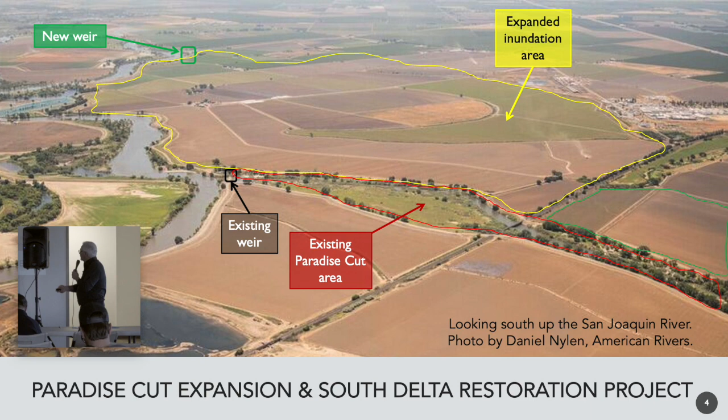And of course, Paradise Cut's gonna go up when we put more water into it - so Paradise Cut itself would rise. That's the old estimate based on the project as originally conceived, but that's not the project we're gonna move forward with. Because of these issues, we wanted to make sure that everybody could support something that didn't hurt them, to put it the wrong way.

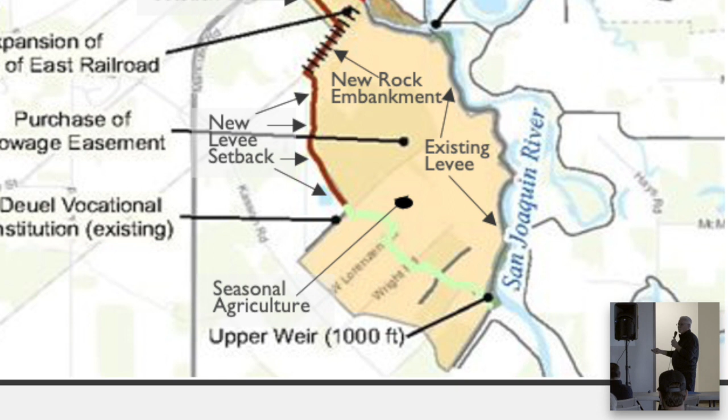So here's the original footprint of the previously conceived Paradise Cut expansion. You go upstream and put a weir, a 1,000-foot weir, and the reason we go upstream is because the analysis of expanding the existing weir didn't get as much water as a new weir upstream. That has to do with the slope of the land leveling out near the weir. Anyway, you get more water.

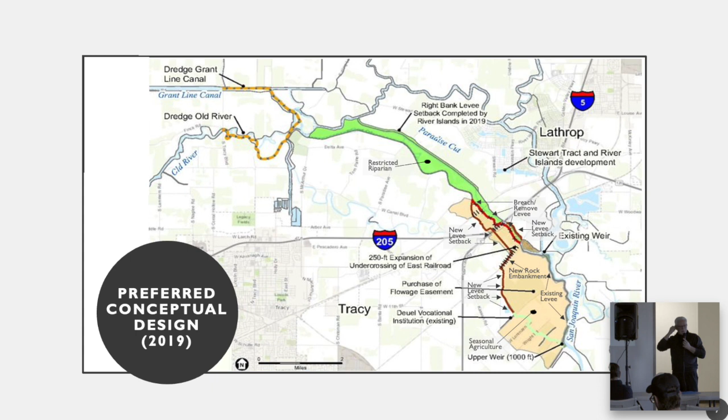You overflow into these areas. We've already talked to Borba Machado, and there's no deal set, but they say they're willing to discuss that, so we're not going in there threatening that we're going to condemn their land. They're willing participants. We'll have to negotiate eventually and pay them what we can if we get that far. But anyway, the overflow goes here.

We have a new levee inboard, on the land side, so the water doesn't keep going somewhere else. We keep the water in here, and then it flows down, and we put it into Paradise Cut. Paradise Cut is that relief bypass, remember I told you? So we want to make sure we route the water off the river to help everybody during those peak flows, and the peak flows are the biggest problem.

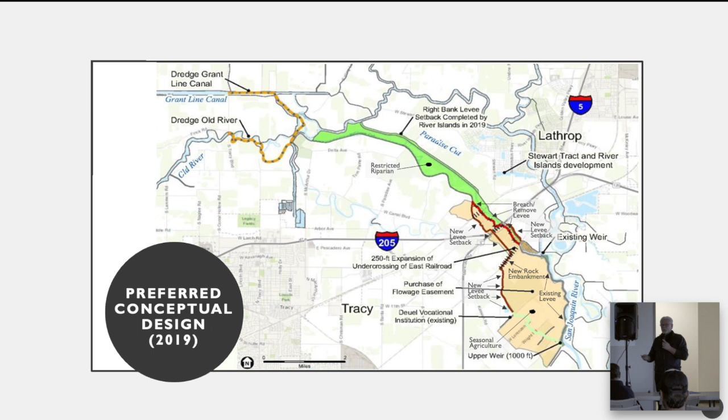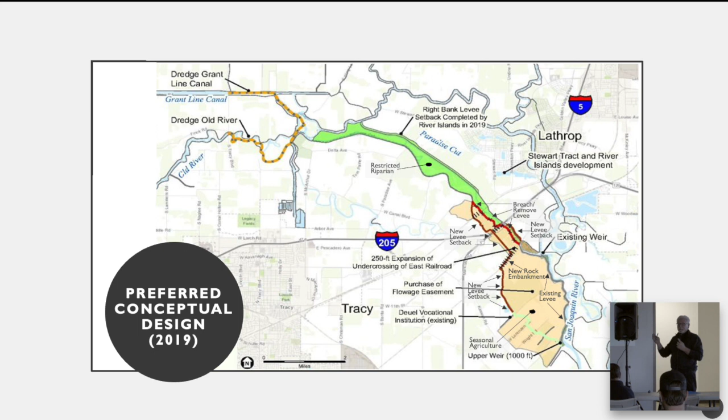I don't know about this year. But anyway, so that's the idea, get those peak flows - they temporarily stay in this area, then flow downstream. We put them back in Paradise Cut. Now, in order to do that right, you've got to do additional engineering analysis. We have to find out how big, how much improvement, any levee work, any rocking - all these things we might have to do so that Paradise Cut safely contains and transports that water.

So River Islands over here has done a wonderful job on levee work and everything. We appreciate them - they've been a partner from the very beginning, both money and support, so I want to thank them. But anyway, we want to make sure that anything we do there is agreeable to RD 2062, RD 2058. Everybody who's involved has to be in agreement, so we figure out what we do. That could include additional levee setbacks.

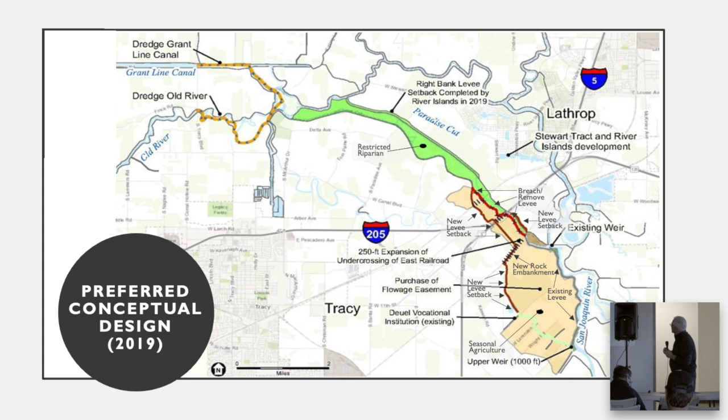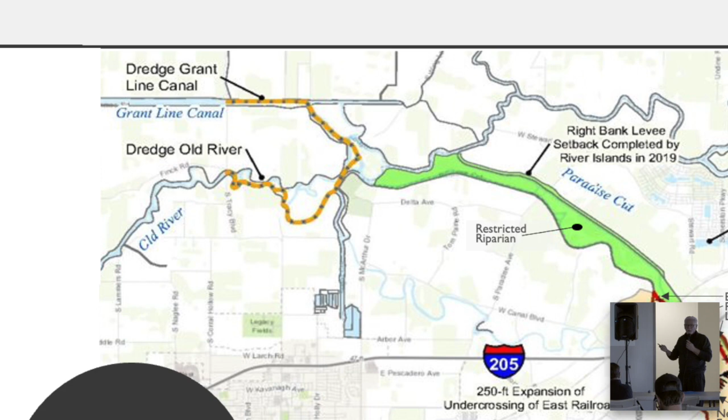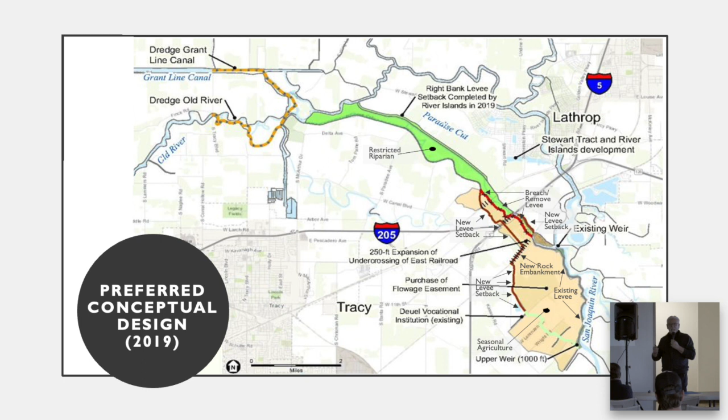That's just a question of land and money and cooperation. So we have to make sure we route the water safely and it gets downstream. Now the original analysis had 5 miles of dredging downstream here to partially address any increase in stage that occurs. That's all been subsumed now into the larger dredging program, but the original idea had this dredging and estimated how that would decrease the stage increase down here.

Normally I have a lot more jokes and a lot more funny pictures in my PowerPoints, but I'm old and fat and looking to retire someday.

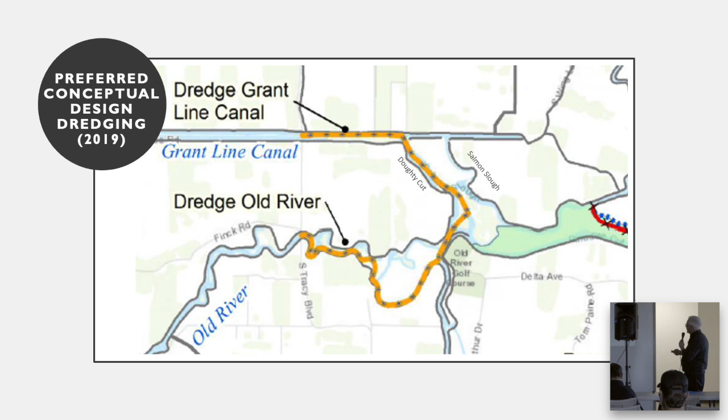Again, here's that original dredging in that original Paradise Cut project. That's not the larger project that we now have, but in the original Paradise Cut project. As most of you know, we've got some serious siltation problems, especially in the Doughty Cut of this Four Corners area. Old River too, it keeps going on, a little bit of Grant Line there. So this was the original dredging there. The original dredging is not what we're doing anymore - we've moved on from that.

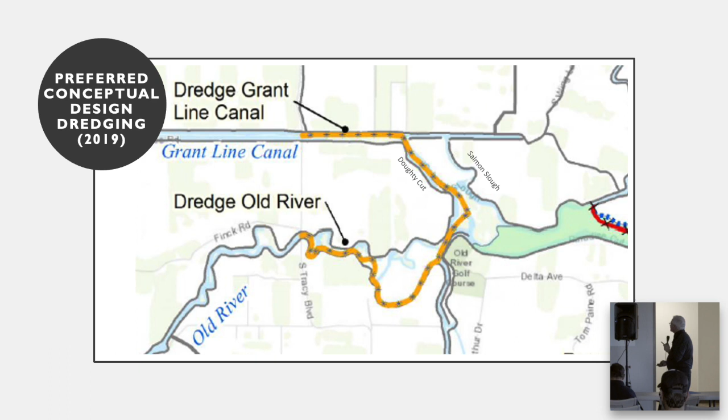So as the Paradise Cut project was going forward, I got a call from a local farmer just before Christmas, about 5 years ago now. He said, 'John, there's no water in Old River.' And I said, 'Oh, there's water in Old River.' He said, 'John, there's no water in Old River.' So I drove out there - it was an oxbow off Old River, and there was a little water around the pump intake.

There was a little bit of water on the other side of the channel, and the water around the pump intake was flowing towards the other water there. That water was 3 or 4 inches deep. It wasn't extreme circumstances, but that channel could not be used for diversion of water.

So from that, a lot of investigations. We certainly know Undine, the Middle River under Undine Bridge, it's this deep sometimes with the barriers in. Very bad situation. So that gave me a new goal in life, which is to dredge the South Delta channels, because without that, the situation keeps getting worse. The high flows aren't moving the silt out anymore. We've crossed some threshold, and now we just get larger things.

Richard Pellegrini took me out there one day, and there was a sandbar one year, and the next year, after high flows, there was an island, not a sandbar. So we have this serious problem.

So anyway, the Delta Watermaster was very helpful in getting a diverse group of people together: export interests, state water contractors, San Luis Delta Mendota Water Authority, Westlands Water District, Fish and Game, Fish and Wildlife, DWR, and the Bureau staff. All were involved with the Watermaster in the South Delta, and we pooled some money and did a study for dredging the South Delta.

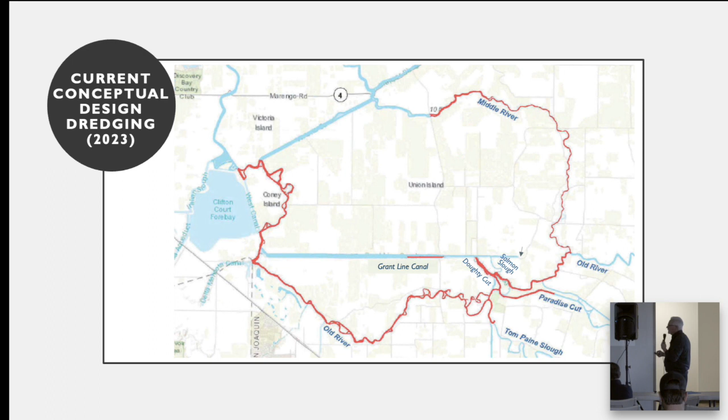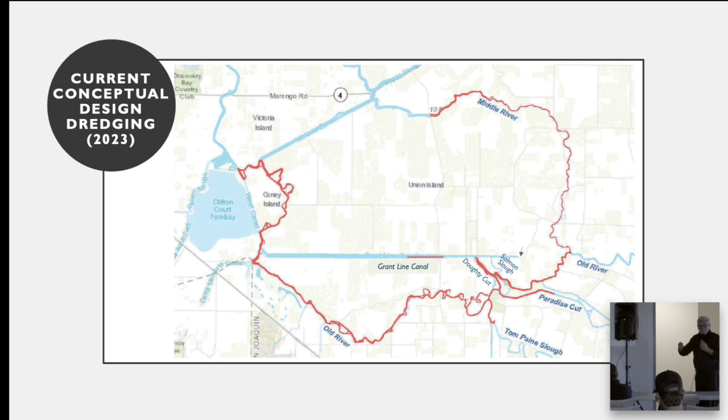So this is the map for dredging the South Delta. This doesn't mean it's comprehensive. We're going to ask for your input on where other areas may be that need dredging. As you can see... I'll take a little credit—every time they drew a line, I said, make it longer.

So anyway, we're dredging all of Old River—this is the plan—all the way up to the head. We're dredging Middle River all the way down to the bridge, or the barrier. We're dredging this area because it's a horrible area with a lot of problems. So it's approximately 25 miles of dredging.

The report we produced specifies depths, costs, and estimates of all sorts of things. That's a starting point—that doesn't mean that's what we're going to do. We want to dredge as deep as possible.

Let me add real quickly, when you have 6 inches of water on Middle River at Undine Bridge, that is not shallow water habitat for fish. That's called warm, generally stagnant water that nothing's in. And so I've taken fishery people out there and shown it to them. I said, is that shallow water habitat? And they say, no, that's not shallow water habitat.

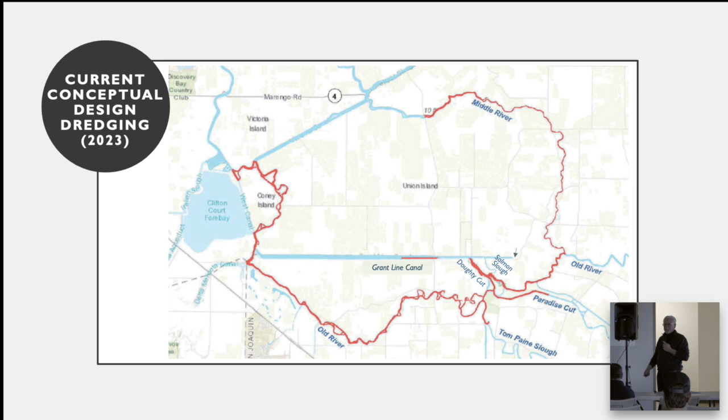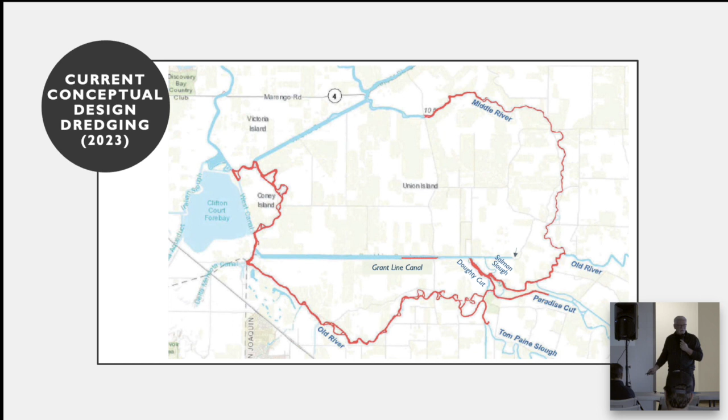And so we've actually got fishery agency people—they're not willing to just give us a permit for nothing, but they're saying, yes, you're right, we need to reestablish the habitat in those channels. So this dredging project is actually creating 25 miles of good, instead of none, shallow water habitat for fish. So we hope that's a big selling point in the future.

Governance: as part of the grant we got from the Delta Conservancy, we were supposed to figure out how this is going to work and who's going to take over. That process led to SJAFCA.

All the RDs, we talked to everybody. All the RDs were in agreement eventually that SJAFCA could and should be the people that take over. The RDs all signed an MOU, Memorandum of Understanding, which outlined how we're going to do this. So we're going to turn this over to SJAFCA, and they're going to move forward.

At the same time, there's an advisory committee that will be formed, and that advisory committee will be us—district engineers, some of the farmers, trustees of the districts, South Delta's there, American Rivers is there. We're gonna have an advisory committee of us, okay? And everything that needs to be decided is gonna go through us first.

Now, I can't get a written guarantee by anybody that if John Herrick says we should do this, we're gonna do it, but that's a really good process. We have some dispute resolution in the memo. We're gonna go through this, and SJAFCA is gonna move forward based on our inputs, recommendations, and decisions. Of course, the ultimate decision for SJAFCA is the SJAFCA board. But that's the way things work. So everything looks pretty good.

Now, so SJAFCA will take over. We have the Department of Water Resources here—why? Because DWR has all sorts of interests in the South Delta, and they've been very helpful, and they will be participating with us as we go forward. We don't know the specifics of the project when it gets going, who's going to be doing what contracts from whom.

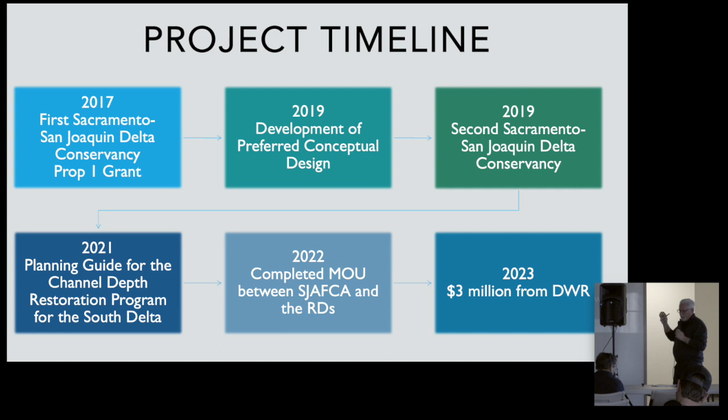But I want you to understand that we have this beautifully looking project with all this habitat, and we're going to make this a really, really good project. And so I'm not quite at the right place to say this, but we've identified an island that we can turn into any habitat we want. Salmon Slough, as many of you know, is a clogged, nasty-looking thing. It's probably got old meth labs besides all sorts of trash and brambles. We've got the southeast border of Grant Line Canal, a big mess of habitat.

We've got many, many channel islands, upstream of Tom Paine Slough, and all sorts of areas we can turn into nice habitat that not only benefits us in the area, but the rest of the world looks at that and says that's good too. Right now the South Delta is kind of devoid of fishery and other species. Well, it shouldn't be that way. So if we can figure out how to do it with our input, with what we think works, in conjunction with the protection of our area, then everything can go smoothly.

So the next part about money is who's going to pay for this. I learned that I didn't know what I was doing a year and a half ago, so I'm trying to learn how to do it the right way. A lot of people, including me, American Rivers, and others, we're now trying to do it the right way. Local representatives, both state and federal, how do we get money? Where do we get this stuff? We got to get that.

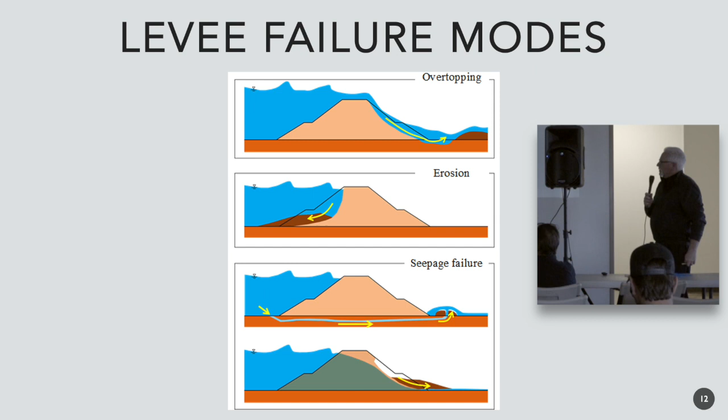Okay, so I've talked too long already. I think the next slide is Bill Eisenstein from ESA, who's one of our consultants and has been very helpful, and won't talk as badly as I do.

That's okay. I think I don't need that because for some reason I got the Britney Spears treatment. I don't know. I have one too, but that's for the video people. Oh, okay. Oh, so I need both. It's entirely up to you. That works better. Okay, great.

Thanks for the clarification. Yes, I'm Bill Eisenstein with Environmental Science Associates. I just want to start by echoing what Petrea and Phil and John have all said, which is thank you for being here this morning. I know it's been a hectic time, hopefully not too stressful a time, but I know everybody's busy and your time is really valuable, and we really appreciate spending a little of it with us this morning.

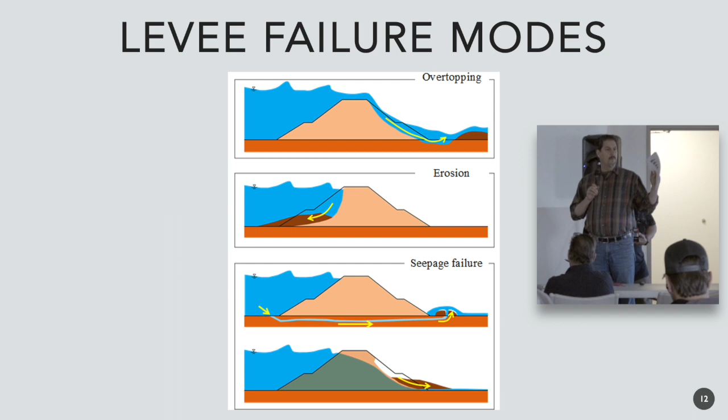I also want to mention, I know the slides are getting just maybe a touch washed out on the screen, so I do want to make a couple references to the report or the handout, which hopefully almost all of you have. This is actually two memos stapled together in this thick packet. And so the images that I'm going to show on the screen appear in the second half of this document. So at points, I'll maybe make a page reference in case it's easier to look at this in the document here than seeing it on the screen, particularly for those who are in the back.

So there's actually two different page numbering systems. In the first memo here, the pages are numbered like 3 of 18 or 4 of 18. The second memo, which is the one written by ESA and the one I'm addressing right now, just has the regular single digit page number at the bottom. So those are the numbers I'll be using for reference. For example, this image is on page 3 of that second memo. I'll make a few more references in case that's helpful as we move through here.

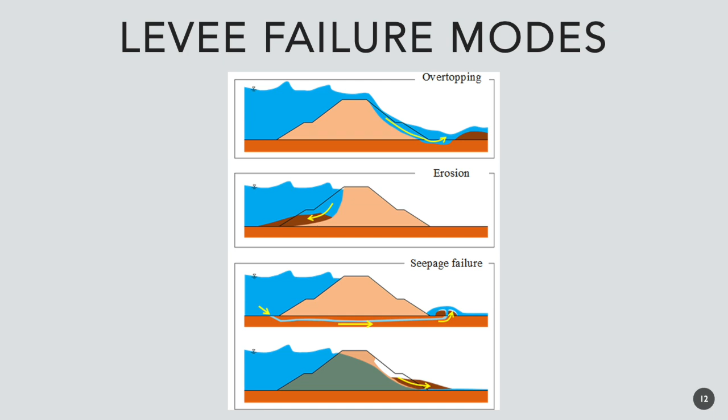As was mentioned, ESA performed a preliminary analysis layered on top of previous analysis conducted by MBK engineers in 2019, of that original preferred conceptual design that John showed several minutes ago, with the 5 miles of dredging and 2 feet depth. That's the hydraulic information I'm going to be showing you. ESA then did some supplemental analysis to understand more about what those hydraulics, what kind of issues they would present in terms of levee failure risk and other downstream impacts.

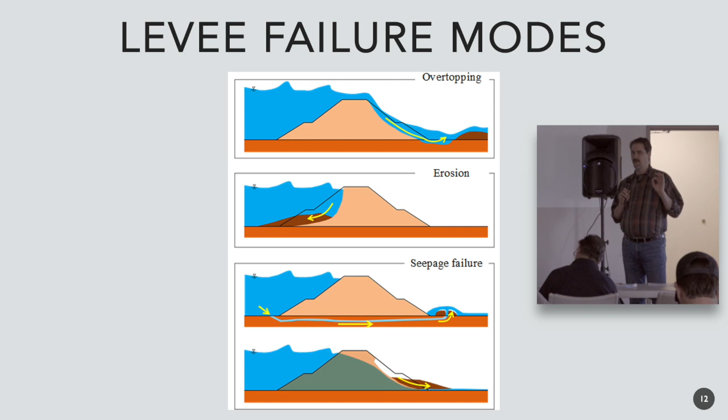I'll talk a little more about the dredging components, and after the break about some strategies that may be helpful for addressing some of these identified risks. I want to emphasize from the beginning that nothing you're seeing is final, nothing is binding. This is preliminary analysis based on a project that doesn't even have a formal project description yet. As Phil said, we should probably call this a proposal instead of a project. It's a concept - we don't even have the first form of engineering designs. So everything you see today is informational, for understanding, for scoping the project as it will eventually move forward.

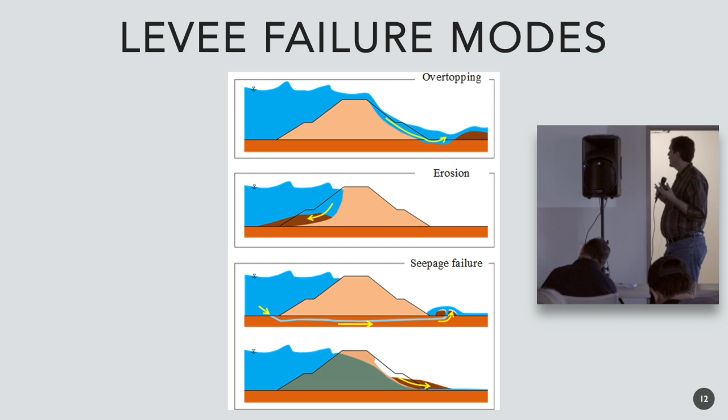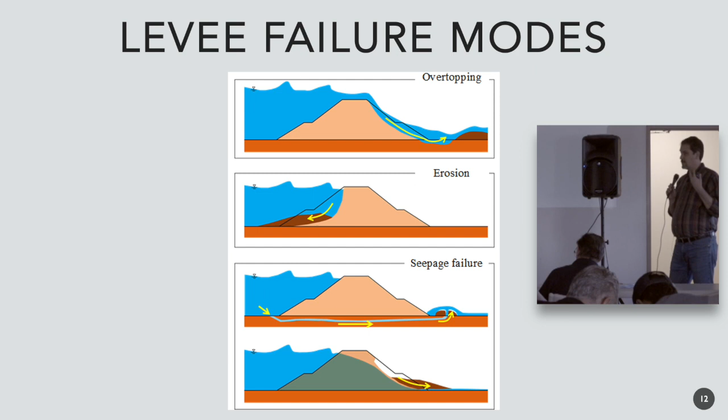So let me start here - again, this is on page 3 of that second memo. These are the basic potential modes of levee failure, very logical and intuitive to everybody in this room. Basically we can think in terms of overtopping risk, erosion risk, and seepage failure risk. Seepage can occur either through a levee or under a levee. You'll see this terminology brought through in a couple places, but just to offer a simple illustration of what we're talking about with these potential levee failure risks.

We took the hydraulic analysis of the project done by MBK in 2019 that focused on the 1997 flood - John referred to this already. That's approximately a 100-year flood, more or less. It's useful for that purpose because that's a common standard in flood engineering, and it's also useful because it's a real event that actually happened - it's not a simulation, so we have some evidence that it's a real thing.

That analysis showed what the effect on flows would be of the implementation of that preferred conceptual design. So what we then did is ask the question: okay, if those flows do come through this levee landscape, what would we expect to see happen? The basic form of information we were able to use to estimate that is what are called index points.

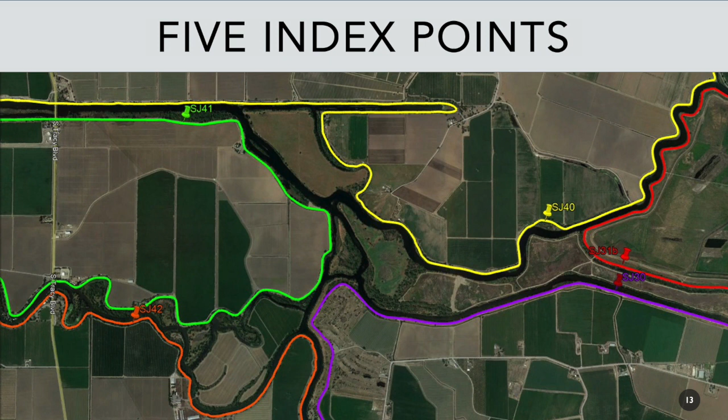For example, SJ41, the green one up top, is meant to represent the entirety of the levee shown in green. The next slide just zooms out on the same thing, to encompass the entirety of these levee reaches represented by these single index points. So again, SJ40 is right here, but it's meant to represent this entire reach of levee.

One of the questions I'll get to in a moment is how representative are these? As Phil said, nobody knows these levees better than you do. These index points are just one point each - there's a limit to how representative it can be. So one of the things we want to learn from you is what are the real conditions in the levees out there? In particular, not so much the average condition, but where are the weakest points? Because that's what really matters in a high flow situation. If the levee just breaks once at its weakest point, we're in trouble - it doesn't matter so much what the average is.

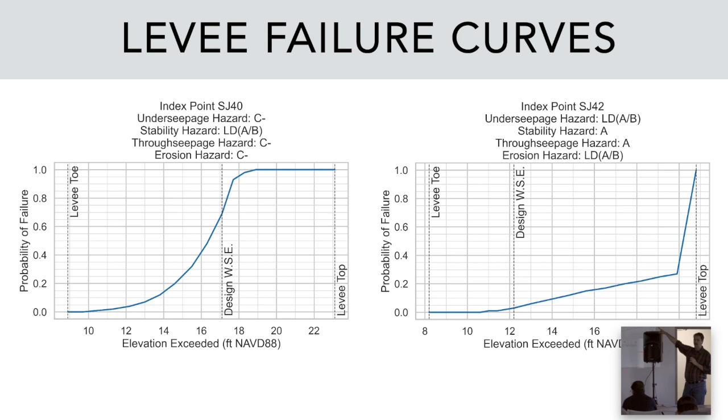So in essence, all these are doing on the x-axis is the water surface elevation, and on the y-axis is the probability of failure of the levee as a function of all of those potential failure modes. You can see the design water surface elevation indicated on each of these. Basically, the analysis with that hydraulic modeling looks at what happens to water surface elevation in these locations, and if you move rightward in water surface elevation, getting higher, what happens to your failure risk - how much more do you go up the curve?

So I showed these two - you can see all 5 in the document, but these are pretty representative of the two basic situations. The shape of the curve is very different in these two cases. In this case we've got a pretty steep curve, representative of those 3 index points more on the eastern side of the project area, clustered around the downstream end of Stewart Tract. Then you've got a couple that are more basically Grant Line and Old River.

Yeah, Phil, go ahead, question.

Okay, on SJ40 I see that the design water surface elevation is at let's say 17 feet, and then on SJ42 it's just barely more than 12 feet. I don't quite understand why the big difference between SJ40 and SJ42, being approximately 5 feet.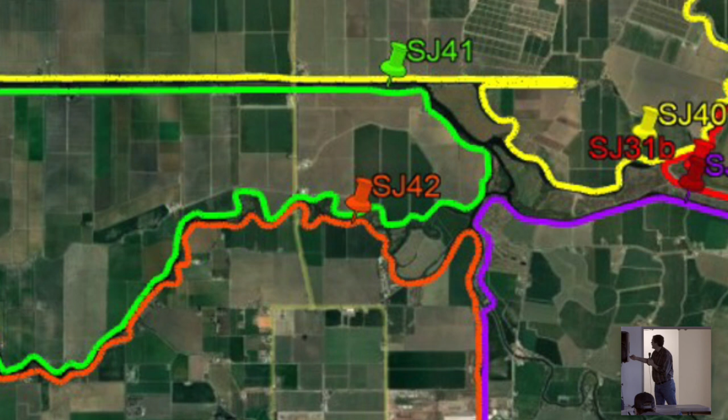Good question. Chris, go back to the map and show the locations of those two. So yeah, SJ40 is right here, and SJ42 is right here. The basic answer has to do with the width of the channel. A given amount of water can flow through but be at a higher elevation in a narrower channel. If it gets out into a wider canal or channel, then it'll spread out and shallow out a little bit. That's the basic answer.

It's the gradient of the river - the gradient of the river is falling as you move westerly, and you're moving into the delta pool. So you're in a riverine gradient coming down Paradise Cut, and as you move west, you're starting to come into the delta pool.

And I forgot I was asked to repeat the questions - did everybody hear the question? I'll repeat it for the video: the question had to do with the difference in elevation between the water surface elevation being shown at 17 feet at SJ40 and being shown a little above 12 feet at SJ42.

Yes, sir. My name is Dominic Gooley, and I'm the Reclamation District Engineer for Reclamation District 1007, which is SJ42. I appreciate all the work you guys have done on this.

That orange dot there, SJ42, is a pretty big levee. As a matter of fact, this storm that we had in January, I believe it might be almost exactly on a spot where we have nearly vertical on the water side. But our levee is at elevation 20, approximately, in that area.

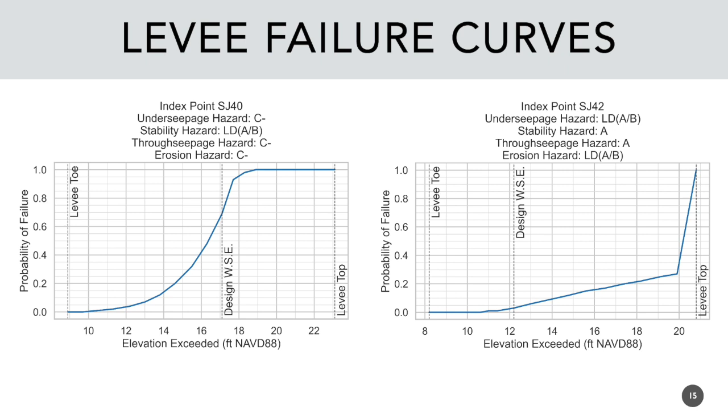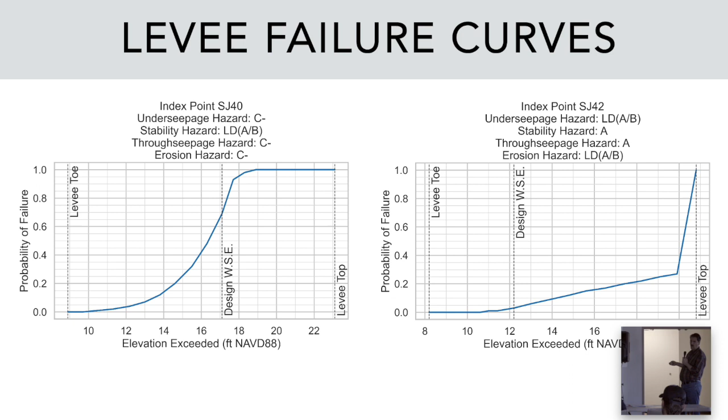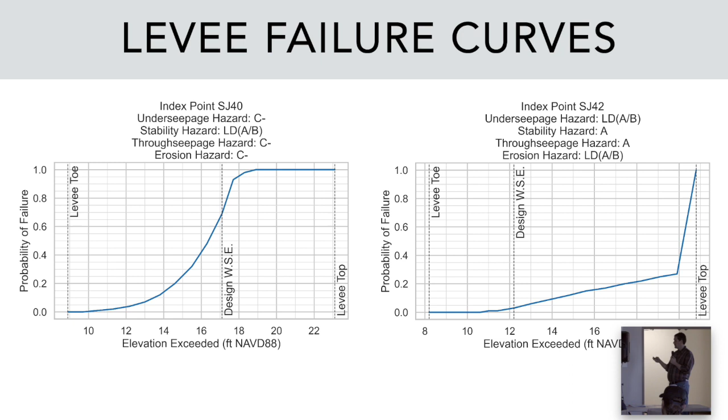I do want to point out again the shape of the curve. So in these easterly index points, as water surface elevation is rising, levee failure risk is rising pretty quick. It's a pretty high curve here. In these two more downstream ones, and I think this gets to the last couple of comments, the channel's a lot wider. The levees have, in some cases, much better grades according to this rating system. So as you move rightward on the elevation, as it's getting higher, failure risk is not rising as fast. It is still rising, but not nearly as fast as it is over here.

So that's just a basic distinction here, and it gets to this results table, on page 8 of the memo, if it's easier to see the numbers there, which just summarizes the basic information. Again, it's got the design water surface elevations, the hazard ratings for all the different forms or modes of levee failure, and then the probability of failure at the design water surface elevation.

In some cases, you can see that number is pretty high already, even before any project occurs. Then what we did is added 0.3 feet to it. That number came from the largest increase that the hydraulic modeling showed at any point in the downstream area. We were attempting to be conservative by choosing the largest potential impact and applying it to all locations. That also has the benefit of being more of an apples-to-apples comparison between different points, so you can get a better comparative look at these issues.

So we just added 0.3 feet to the design water surface elevation and used those curves to get to that change in levee failure performance. Again, maybe things are getting a little blocked for some people, but you can see that in these easterly three, you got somewhere between 14 and 30%, and in these downstream to the Grant Line and Old River situations, it's showing only a 2% change in levee failure probability.

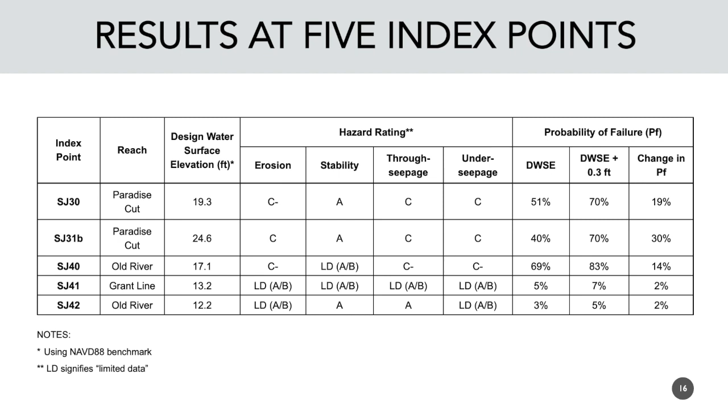Yeah, is that an ongoing part of this project? From what I understand, the basic situation is all typical data gathering operations are continuing. Of course, we'll have gauge readings from a number of places - we'll have all of that. But at some point in the future, we'll be able to look back retrospectively on that. I'm not aware of anything supplemental happening as far as data collection for flows in the South Delta right now.

So Chris and John both seem to be shaking their heads too, so yeah, I think nothing supplemental beyond the ordinary is happening right now. I will say that we do have certain forms of data collection that are much better technologically than they were the last time we had a high flow, and you're an engineer so you're well aware - remote sensing, aerial photos - we have a lot more of that sort of thing than we did even in 2017, never mind 1997. So we can look back into the past a little bit better than we used to be able to.

It might be logical, maybe for some of the river stages, to not just use the gauges, but to take measurements where the weirs and existing elevations are down Paradise, which might inform hydraulic modeling better with real data rather than looking back or trying to use '97 or 2017 data. Yeah, great point. Yep.

Why is the curve so steep? If it goes a 2-foot rise in elevation, it basically doubles the probability of a levee failure - is that what causes that? Well, essentially, I know the curve says that, but what makes the curve so steep?

Well, part of it is that it's a constrained channel laterally, so as more flow comes in, the elevation is rising pretty quickly. I guess one thing I should have clarified is that none of this has anything to do with overtopping risk - it's erosion and seepage risk that get you first, and I think that's probably intuitive. As the water's rising, even before it gets to the levee crown, there's a lot of velocity usually in a high flow situation. There's a lot of erosion and there's seepage, and basically the hydrostatic pressure of the water on the levee is rising pretty quickly - even faster than the water surface elevation is. So it's basically the weight of the water, in essence, pushing its way through the levee and finding weak points either underneath or in the body of the levee for through-seepage.

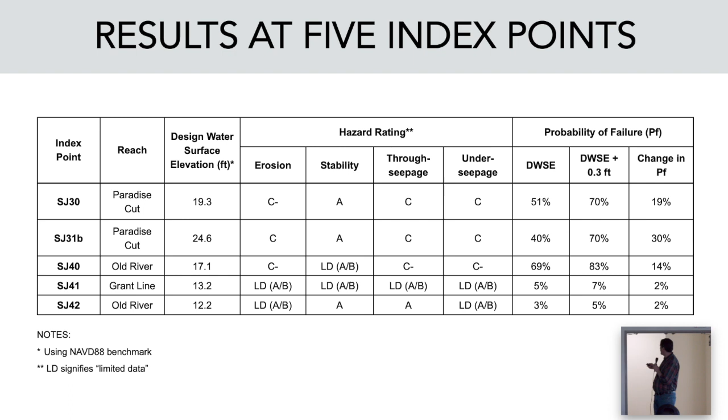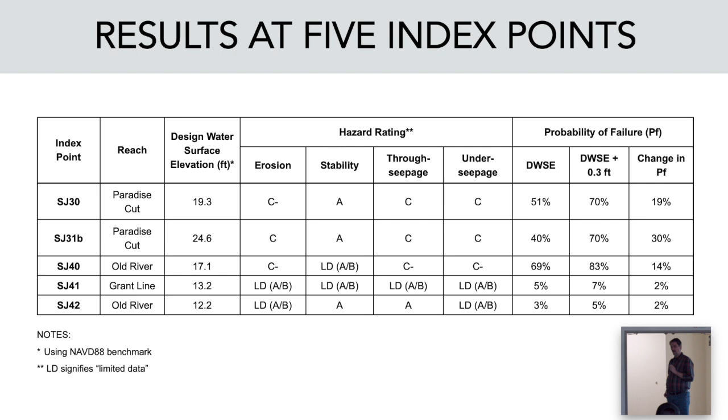So the 2 feet of water is going to double the failure mode, it seems. Well, I don't know about double, but it is rising in some of these cases. In this case, it's going from 51% to 70%. I'm looking at the chart using basically 2 feet of water - 2 feet would make it go from 0.2 to 0.4.

But isn't that what the model has determined? Yeah, is that true or not? That's what the modeling predicts - this is a modeling estimation. And again, this is a preliminary analysis. I can make a model where 2 times 2 equals 5, too. Well, but if you're going to start an analysis, you have to start with the existing ways of analyzing it. And one of those is just DWR, of course - so their model is used to do this initial evaluation.

If we don't think it's right, eventually we'll have to do something else. But we'll just start with the current set of analytical tools for now.

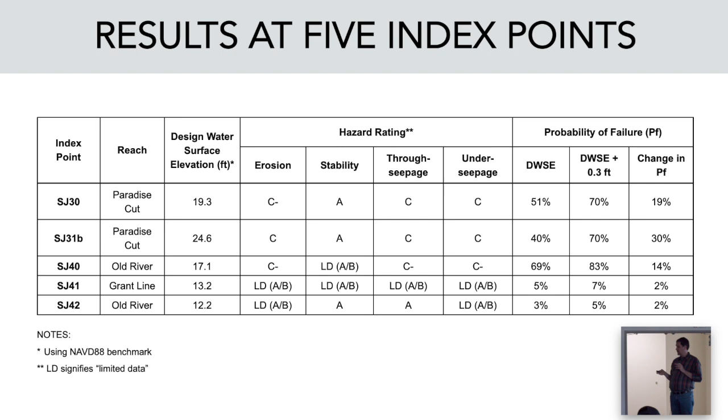Just to recap, there was a question about what causes the failure risk to rise as steeply as it does. This is a characterization based on these limited index points. What we want to learn from you, and I think we need to go to our break, but the break is a good opportunity to start gathering insight from you. There's a map in the back, and one of the things we'd like to learn is how representative these index points really are, and where there are challenging points in the levee system that ought to be flagged for the analysis moving forward. No one knows that better than you all.

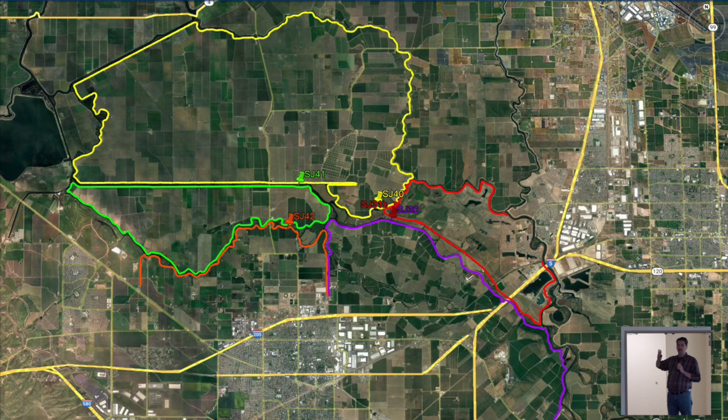If you have anything to share on those topics, we have a system back here where you can put a Post-it note on a map. There are comment forms behind the report or memo you got, and a loose 8.5 by 11 sheet where you can write out a comment. Any verbal input is also very welcome. We just want to start gathering that insight from you all.

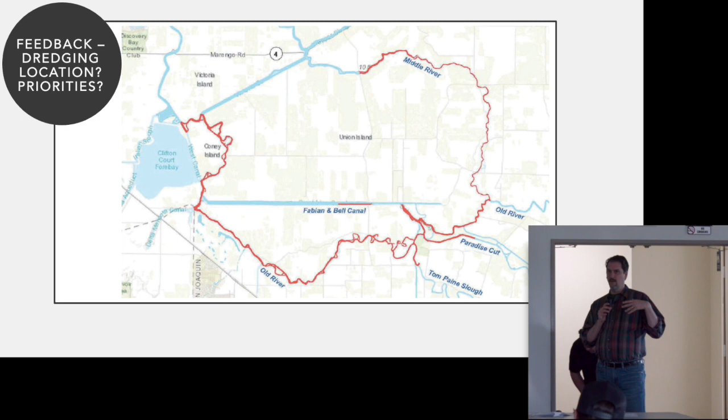As John mentioned early on, dredging is a feature of this project. I emphasize the word feature because, as John and Petrea and others who've been involved in this for a long time have heard you say, that is a critical component of anything that would occur in this project concept space. I want to emphasize that this is a project concept that includes dredging. We're not simply putting dredging in here as a flow management measure or mitigation. It's a central component of the project, right along with the new weir, the habitat restoration, and all the other components that John mentioned at the outset.

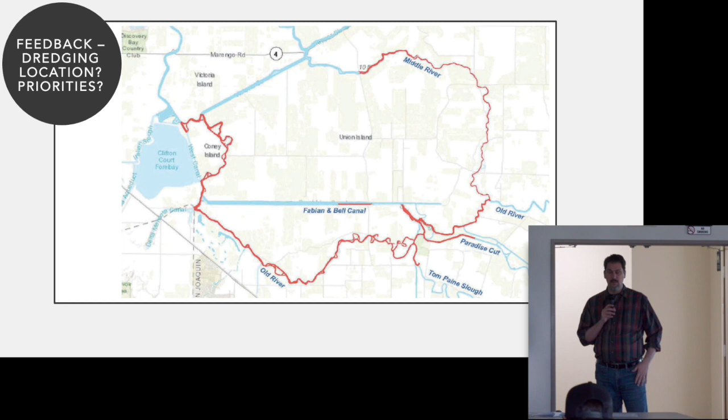As John emphasized, dredging does bring other benefits beyond improving the hydraulics and potentially reducing levee failure risk. It also provides the basis for aquatic habitat—by itself it doesn't create aquatic habitat, but it provides the basis for it—and it will also have water supply benefits.

The hydraulic model that I showed, which was the basis of what you just saw, included the scope of dredging that existed in 2019—5 miles of dredging at 2-foot depth. The hydraulic analysis and levee failure analysis did show that this contributed to reducing water surface elevations and therefore reducing levee failure risk. But it's by no means the only action that would reduce those things, and possibly not the most effective action, which is why it's important to include it in the project from the beginning as a component, rather than framing it as a mitigation or harm reduction measure.

As John emphasized, since the 2019 project concept was developed, the potential scope of the dredging has been expanded quite substantially. Now it encompasses 25 miles of channels—essentially the entire length of Old River, Middle River, all the way up to a long distance downstream of Paradise Cut itself.

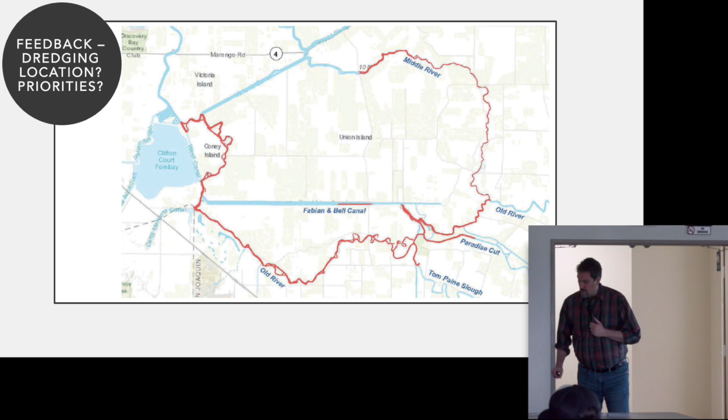One of the questions on your mind naturally might be: if we dredge more, is it going to affect the water surface elevations and the levee failure risks that we just saw? The answer is probably yes, but it's not necessarily a clear one-to-one or straightforward relationship.

Part of that is because we're down very close to tidal elevation. The hydrodynamics of the South Delta are extremely complex, so it's not necessarily the case that if you dredged 4 feet instead of 2 feet, it would double the benefits. Not necessarily, because at some point you hit tidal elevation and water flowing in from the river starts to back up against the tides, against sea level.

So the real answer as to what effect this additional dredging will have on the levee failure risks is still to be determined. This little preliminary analysis is nowhere near enough to determine that question. It's going to have to be a substantial engineering study, a hydraulic modeling study, that looks at that.

But that's all to be determined, how much effect that is and what that will show. So for now, we want to think about the proper scope of dredging in the project on the basis of the multiple benefits it brings, not only the hydraulic issue but other benefits, and think about that in the full scope.

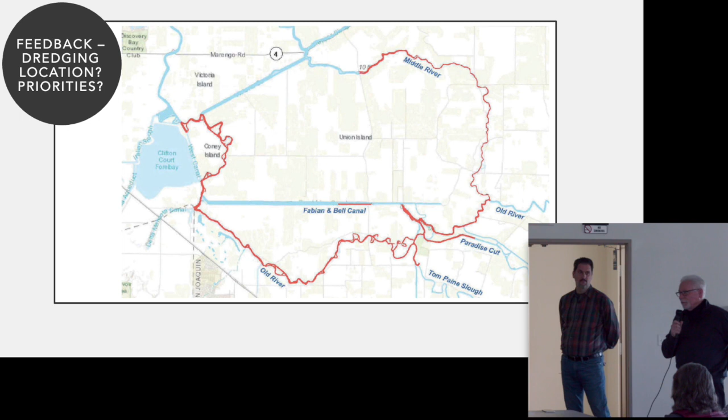No, those are the specific kinds of issues. The San Joaquin River needs to be dredged in the abstract for flood protection, for carrying capacity, but there are impacts. So I assured Banta Carbona that's not on the dredging program right now. If it's on a dredging program in the future, it'll be a program that those people along that river say, yes, that's a good idea, and this is how we would do it.

Because those specific things are very important, and they may not appear on the surface when you're examining it. So, sorry for yapping. No, it's good.

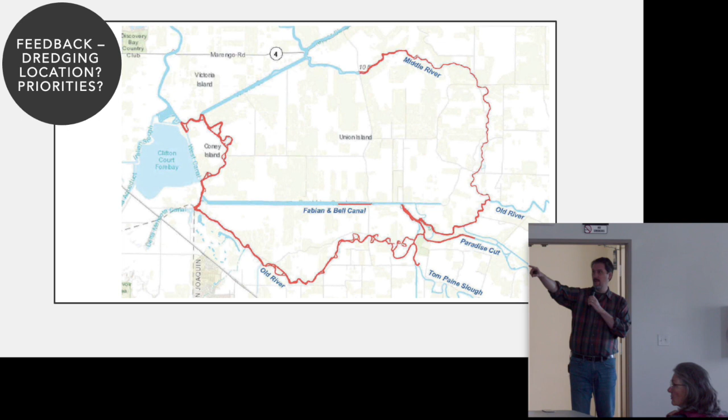Hi, I'm Mary Hildebrand, and I'm up in that area that's going to benefit a great deal from this project, but I wasn't raised to get what I need by stepping on other people. So all along here, I've been advocating for making sure the downstream areas are taken care of, and that this had to be part of the project and not mitigation.

So I want to make sure that everybody understands, and I want John to speak a little bit about it - it may feel overwhelming that you're supposed to be giving all this feedback right here on the spot. There is going to be an advisory group, I don't think you touched on, John, that the Flood Control Agency is going to work with as we move forward.

Yes, we did touch on earlier the advisory committee for this process. But that's the key here - this is well beyond an idea, but we're not there yet. So we're trying to make sure that everybody's taken care of. We're not trying to shift one burden onto somebody else.

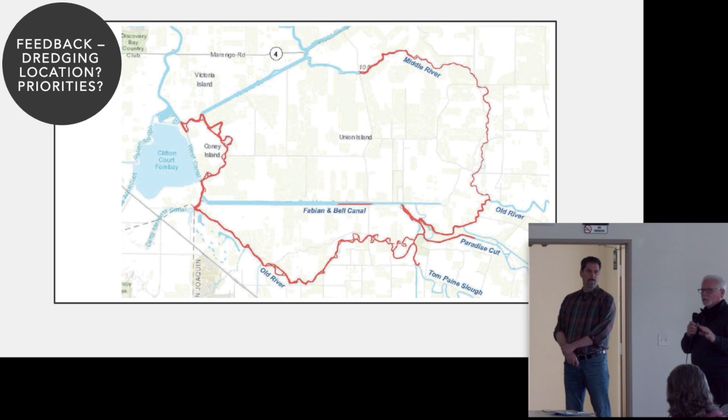At some point, we produced a summary paper on the dredging aspect of the larger dredging project, and that explains all that stuff, so I can get that to anybody who wants. But that's one of the big issues here - when Middle River has 7 inches of water, 8 inches of water, a foot of water in it, that doesn't work. And so people call me every year and say, John, I can't irrigate here because the water level's too low. We've got to solve that.

Now, this also addresses exporter issues, because the exporters pull water through the channels, and when they can't pull enough water from one place, it comes from another place because of hydrodynamics, and conflicts arise. So everybody who's involved in this says, yeah, that makes perfect sense - water supply, water reliability, water quality is improved if we do certain things. And so it's a benefit to all of the beneficial uses. We just have to make sure that as we configure it, it doesn't push an impact to somewhere else that's not addressed. And again, we say this over and over again.

I'm sorry for being repetitive, but it's up to you, through your representatives or personally, to talk to us along the way to make sure your concerns are addressed. And we're going to do that. And if we can't, somebody will shoot me and we'll move on without a project. So rest assured we're here to help, even though that sounds ridiculous coming from people with a microphone who are kind of the government.

Maybe just to emphasize one thing in response to Mary's comment earlier: if anybody's feeling like you're on the spot today to provide input, please let me reassure you, the window is open for literally probably a couple of years, if not more.

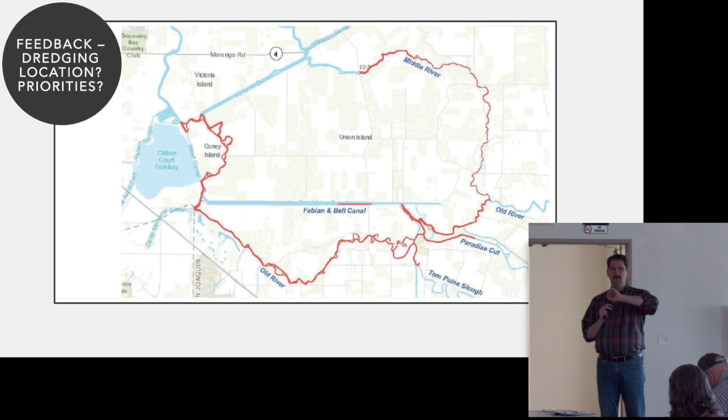So there's lots of time, don't worry about that, but please keep the comments and input coming whenever it strikes you. Today would be a good start, but the window's definitely open. So Dominic again, and then this gentleman, and then maybe I'll move on to the other topic so we can keep moving through our agenda.

Yeah, I'd like to say thank you to the Resource Conservation District, because they did get us involved early, as Mary said. Seeing the old river being dredged along there is good, but I don't see the Grant Line Canal being dredged. My concern is that if you deepen the old river, all the water may come toward us rather than going into the Grant Line Canal.

It looks to me like Grant Line Canal is very huge there to the left of the word Fabian, and maybe you might consider putting a channel right across Fabian Tract there to get the water to the canal.

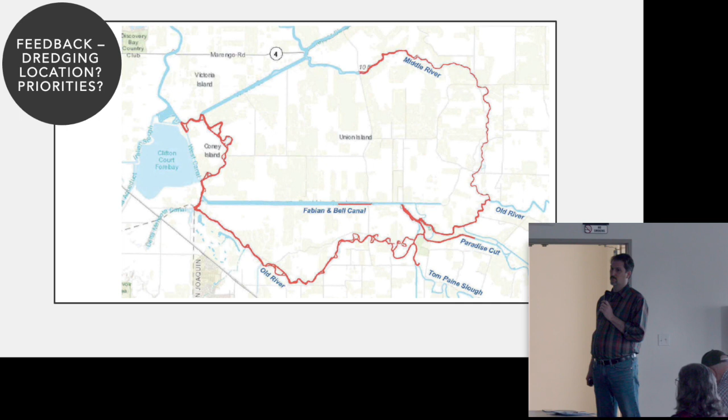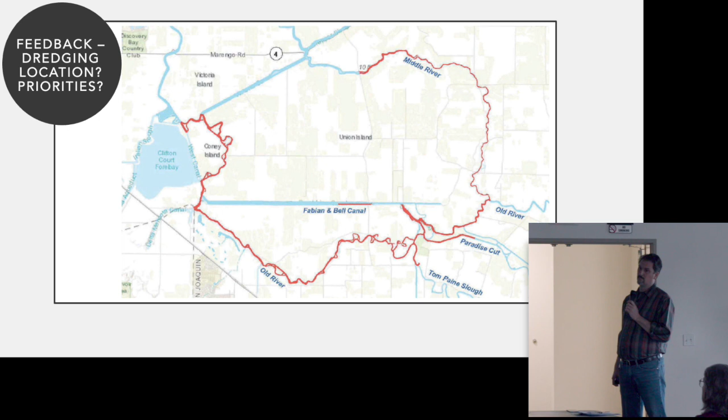Now, one thing to keep in mind is Clifton Court Forebay, the pumps are right there. I'm the district engineer for Upper Jones Tract. When the pumps are on, the tide is reversed, they're so strong they can pull the water and reverse the tide. So in a flood situation with those pumps fully on, the water is going to be affected by that. I think if you can get it to that thick part of Grant Line Canal, the pumps will take over from there.

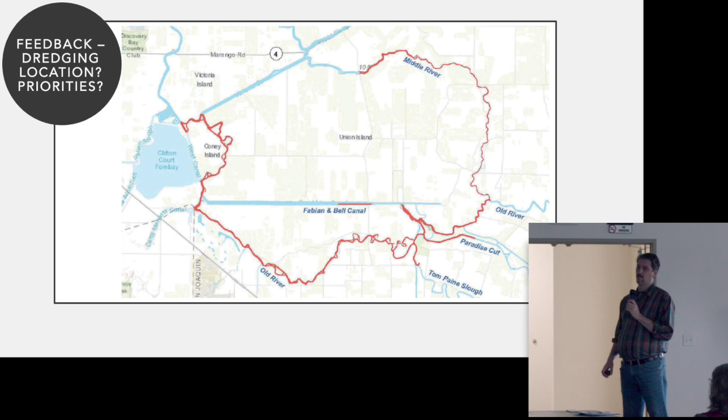Another thing that maybe should be given some consideration is Tom Paine Slough down there, which is challenged for water. I'm not sure you could use it as a flood control component, but there might be some opportunities for wetland restoration or something like that. There's opportunities there, and that district, I believe, would be interested.

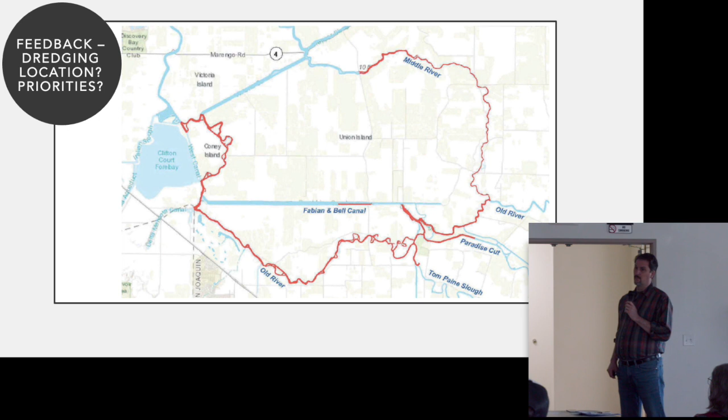Tom Paine Slough is tules in a lot of areas, so I don't think you could really push too much water through there, but there might be some advantage to restoring it to its original condition.

So there are a lot of good ideas in there. Would you maybe note some of those down in bullet points on the comment sheet so we can maintain those? I'll make up a list of comments. Yeah, that'd be great. The thought of maintaining appropriate flow splits among different channels is another important subject that would be addressed by a hydraulic model done on a real project design.

One more question back here and then we can move on. Basically the same comment: wouldn't it make sense, from Old River to the Forebay, to sound the whole system, not only for depth of the channels but also the width, and then calculate the capacity of each system? That way, before you do it, you'd have an idea of where your problems will come from.

Most of that was done preliminarily in the report that led to the planning guide for the dredging. So South Delta and some DWR new stuff, we sounded most of the channels. They went through the calculations of capacity, how deep you want to go. They looked at prior surveys from years ago. Where do you want to establish that? So that's all preliminary been done, but that is exactly right.

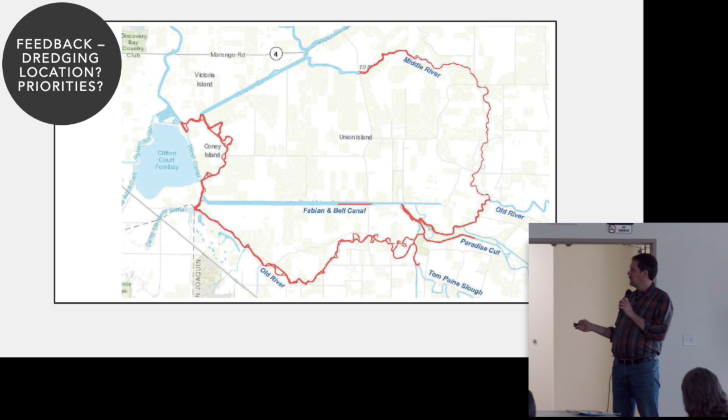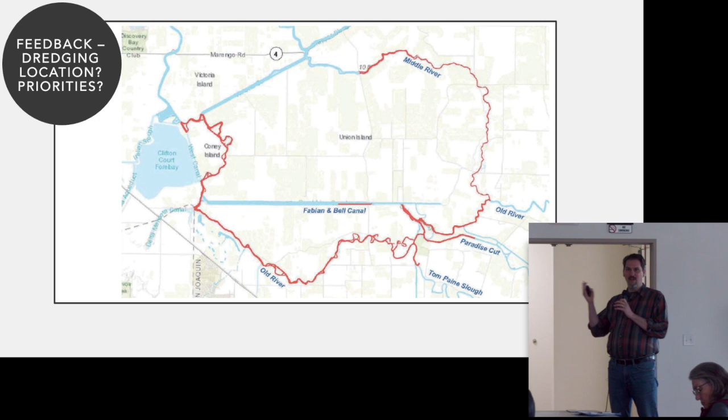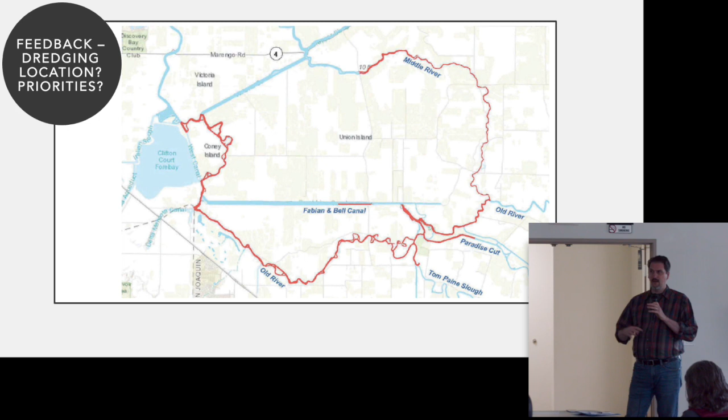I'll just note one other thing before we move on from dredging, similar to the levees, it's basically a common sense idea: it matters a lot what the typical condition along a long reach of channel is, but it also matters what the tight choke points are. With the levee it's like what is the weakest point, and with the dredging it's like, where's the tightest choke point? Obviously you'd want to relieve those first, reduce those bottlenecks on how the water flows through, so maybe you can phase things or approach it that way. Again, much more analysis needed, but generally that common sense logic does apply in those situations.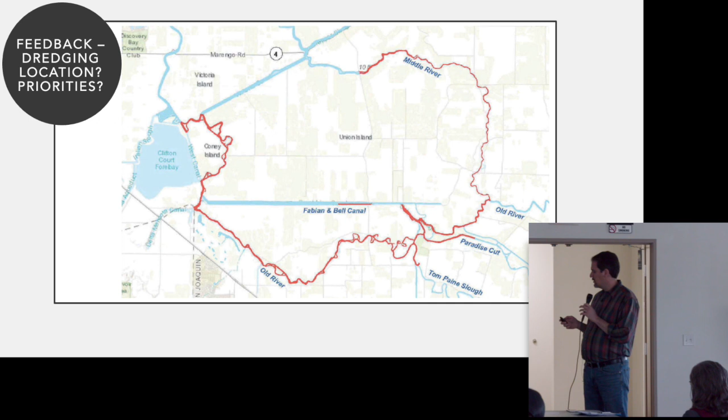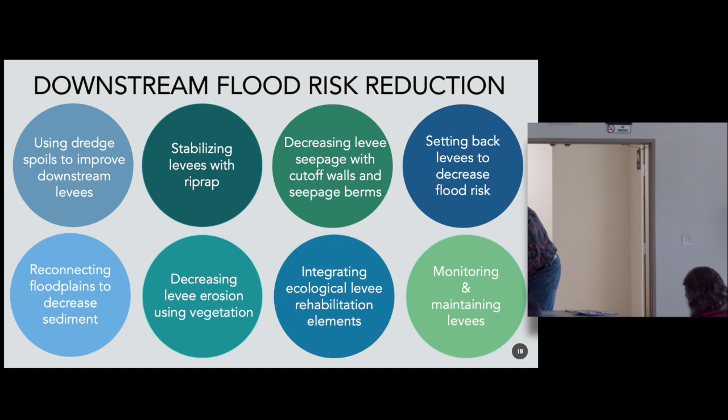Okay, let me spend a few minutes talking about a few of these downstream flood risk reduction items. If that's hard to read, this is in the RCD memo, the first half of your packet, with pages marked starting on page 6 of 18, and it goes for several pages afterward. There's some illustrations of these and a greater description you can read when you have time, but I just want to cruise through these quickly to feed our thinking about what's possible.

Beginning in the upper left, we've got using dredge spoils to improve downstream levees. John mentioned this earlier. It's common sense that if you're pulling a lot of dredge material out of the channels, wouldn't it be great if we could use it to strengthen levees, either by widening or heightening them. If you heighten a levee you have to widen it too, since you have to expand the base. There's also the possibility of doing a seepage berm behind a levee, building a bench that's there to prevent boiling and under-seepage from coming under the levee. That can be appropriate in many situations.

To the extent possible, it would be very good, both for cost reasons and other reasons, to use dredge spoils if possible. One thing that can be a deal breaker is if those dredge spoils are contaminated with any toxic material you wouldn't want spread on the surface, for a farm field, habitat, or any terrestrial use. The Anchor report that John mentioned did analyze that topic, did some initial analysis, and did not discover any contamination problems of concern at that first level of analysis. So it's so far so good, but it's something that will have to continue to be analyzed as a process like this moves forward.

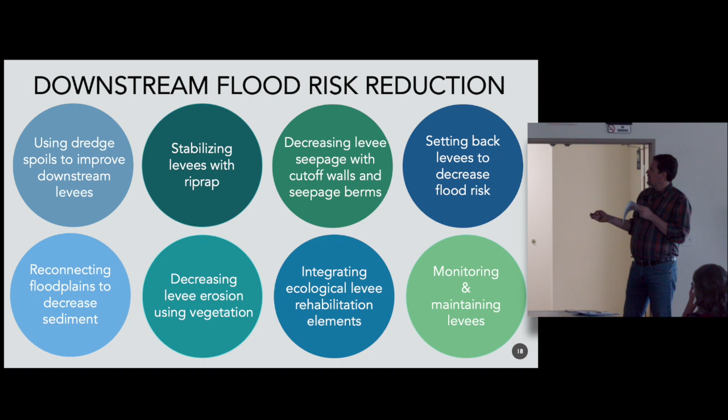Stabilizing levees with riprap - this is pretty traditional. You see this everywhere: some kind of quarry stone or other hard stone placed on the water side of levees, primarily to reduce erosion-related seepage, but mainly to resist erosion. When high water comes through fast, it likes to cut through soil and banks, but it's much harder to do that through stone or other rigid material.

Decreasing levee seepage with cutoff walls and seepage berms. These are pretty traditional structural solutions - those of you who are RD engineers know these things better than I do. Cutoff walls are rigid walls embedded inside a levee to resist through seepage. Seepage berms are material mounded behind the levee, lower than the levee, as a lower bench, resisting under seepage that might come through.

Setting back levees to decrease the flood risk. You saw in some of those cases, I didn't emphasize it much on the map, but in some locations the channel's getting pretty narrow laterally. This is all conceptual toolbox type thinking at this point, but there could be locations where setting back and widening out the channel would make sense and reduce some of those failure risks.

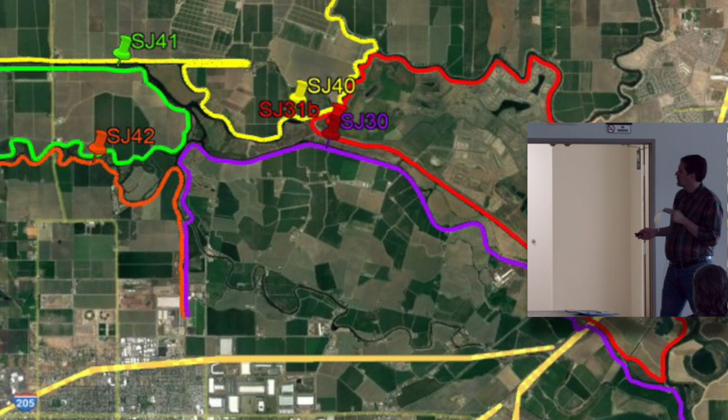Reconnecting floodplains to decrease sediment. John just mentioned sediment dynamics, and we talked about it with dredging. Sediment dynamics of the lower San Joaquin River system are not very well understood in general - there's no good model, the state doesn't have one. Nobody really has a functioning sediment model showing how sediment travels through the lower San Joaquin and into Paradise Cut when the weir spills. The South Delta is really complicated because of tidal dynamics, with water washing both directions in and out all the time, carrying sediment too. But if Paradise Cut spills or flows do bring sediment in from the San Joaquin, it may be desirable, rather than having that sediment settle in the deep parts of the channels - which undoes the dredging - to try to find other places for that sediment to fall out of the water. That's another conceptual thought that might apply here.

Decreasing levee erosion using vegetation. This can be an alternative to riprap in some situations, addressing the same thing - trying to resist the erosive force of water - but doing it with vegetation plantings instead of hard materials. Obviously that's better for habitat, though there are challenges with that, as most of us know.

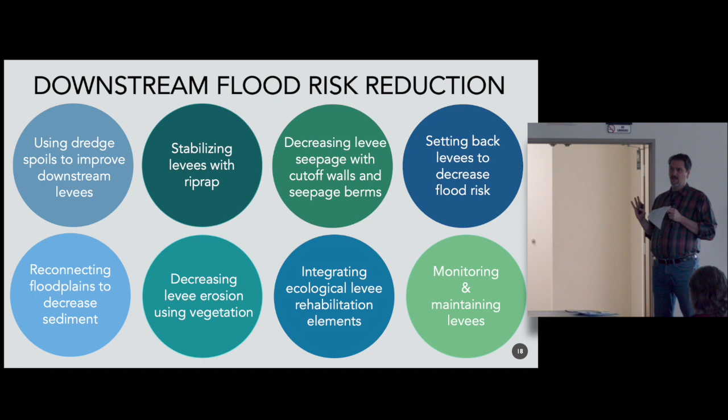Vegetation on levees is a controversial topic. The U.S. Army Corps of Engineers, for example, does not generally permit intentional planting of vegetation into levees that are part of the state and federal project, which is the case for levees as far down as essentially the west end of Stewart Tract - those are what we call project levees. So there are complexities with this, but there are situations where you can get the same erosion resistance benefits from vegetation while also getting habitat benefit.

Integrating ecological levee rehabilitation elements - this is a bit of a composite of a few others, a more deluxe model of perhaps creating a second levee, like a setback levee behind an original levee, breaching that original levee in a couple of places so you can create a designed side channel or back channel habitat behind the original flood control levee, while still having a good setback levee providing flood protection at least as good, hopefully better, than the original. Our friends at KSN have some design experience with this, and it's been tried in a couple of locations, so it could have applicability.

And then finally, as simple as it sounds, there's monitoring and maintenance of levees - that's just the bread and butter of how intensively levees are monitored and watched, and how active the maintenance is. It could be the case, not rendering any judgments, that in some situations where we might have a relatively modest increase in levee risk, funding for an increased tempo of maintenance and monitoring, and just increased activity on those fronts - addressing small problems before they become big problems - might do enough.

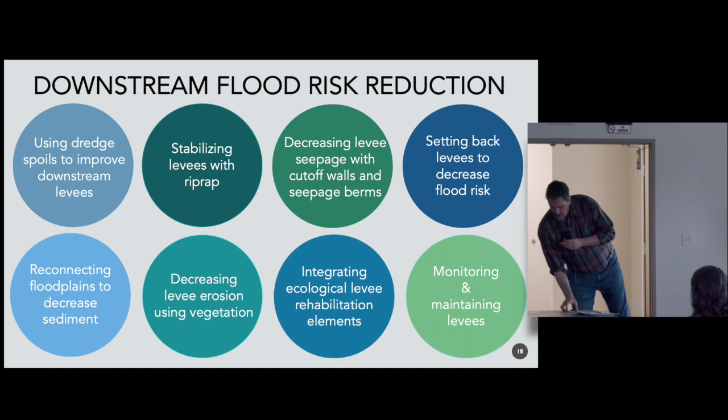I would like to suggest that stabilizing levees with riprap is very important, but prior to doing that, first we will have to restore the waterside levee slope to its original condition, because now they're vertical. When they were originally built, they were flatter, 2 to 1 or so, and that needs to be done before we can put the riprap on.

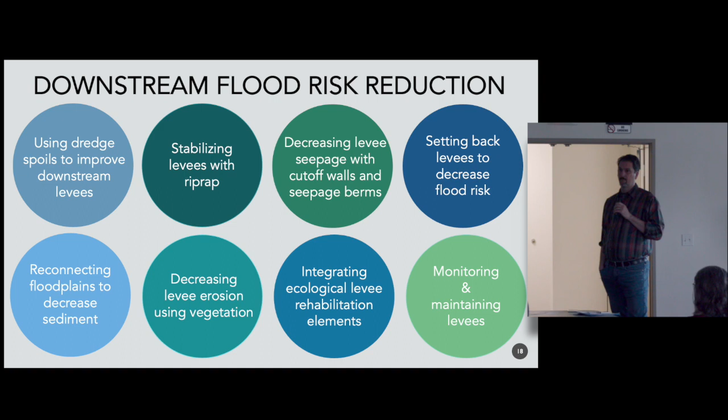So maybe you could add to that black circle up there the words 'restore to the original slope.' Repeating the comment for the sake of the video: the thought of adding restoration of original design parameters, design quality to the levees. They weren't necessarily designed back then - Louis Galley would just build the levee and it would be what it was. It was a 2 to 1 slope, he didn't build it vertical. He wasn't that good.

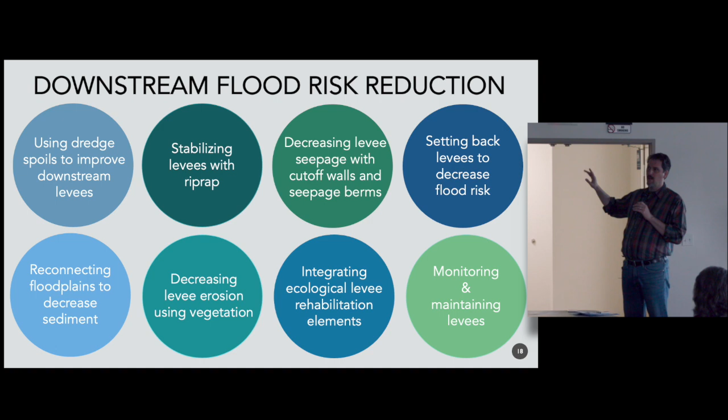It was pointed out to me in the break, particularly at SJ 30, I believe SJ 40, that this levee is quite narrow and quite steep vertically, kind of to your point. That was another location pointed out to me as having those characteristics, and it also happens to be where the channel is bottlenecking pretty tight. So that's probably going a long way to explaining why the risk curves were a lot steeper for these levees than some of these over here.

Other comments, and then I'm transitioning back to John. I'll also add one other thing: on the table when you came in, there was another big, thick document - the existing and needed technical studies report. That's a previous report ESA wrote, at the behest of the RCD, summarizing all the technical work done on Paradise Cut, dating back more than 10 years in a lot of cases, and also trying to identify what the additional needs for more analysis are. Your comments are very welcome in terms of identifying what those additional needs are.

So is there a geotechnical study that should be done on a certain levee reach? There was a suggestion earlier about maybe doing some soundings in bathymetry, and I know a lot of that occurs already, but maybe there are some locations where we want to do that in more detail or more frequently. Anything of that nature would be really, really valuable to hear about.

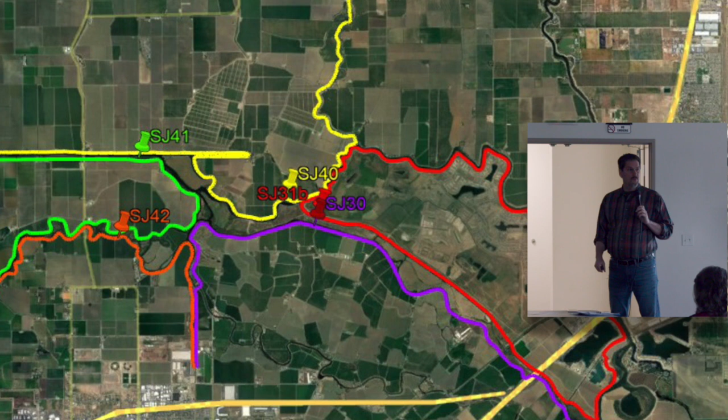Thank you. I'm a little disappointed in everybody, because when we were preparing for this, I told them that there are going to be people that are nasty and yelling, and just direct that to me, and nobody's yelling. So come on, wake up.

Okay, out of order earlier I talked about habitat restoration issues, so let me just do it again real quickly. Various people have different thoughts on the degree to which we should have habitat and restoration efforts, and I understand that, but we're trying to design a project that everybody likes - isn't that the easiest way to get something done? It's not that we're anti-habitat, it's just that our first impression on things is we've got to make sure the levee's strong, so when water comes down it doesn't flood, and we'd like to be able to divert water from our channels. Those are the first two things that come to us. But there's nobody here that says things like, oh, we don't want to do any habitat, we hate this stuff.

Of course we want to do habitat. There are all sorts of possibilities, and I've written down a lot of them, and put that in a lot of the memos we've sent to people to explain things, and it really makes the whole area better. As I said before, there's numerous things we can do. Let's just start.

The hyacinth and Egeria - if you're on Middle River, you know there's an Egeria and hyacinth problem. If you're in the rest of the Delta, you know there's a hyacinth problem. When you dredge 25 miles of channel and go down 4 to 8 feet, all the Egeria is taken out, and the hyacinth will be taken out too. That's not a long-term solution, but it helps everybody immediately. That's a habitat issue - you've got more water in the channel, more oxygen in the channel, and the deeper the channel, the less sunlight goes through and the less the Egeria will grow.

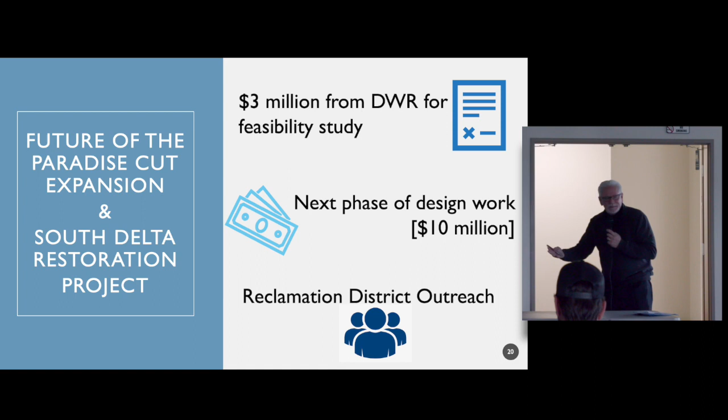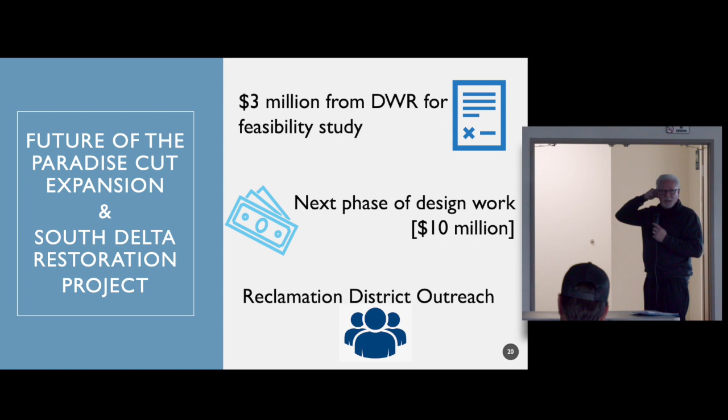They're telling us that we're going to have these huge rise in flood and in an ocean stage coming up, but I don't know if that's true or not, or to what degree it's true. But you guys have to have plans, right? Because when we have high flows, they come looking at the trustees and the engineers and say, Nudek, you're an idiot. No, sorry, that's what Dante says. Can't help that. Okay, thank you.

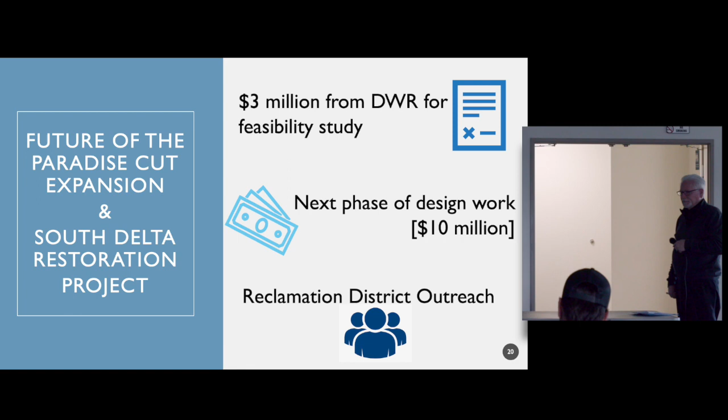Again, Dominic, Reclamation District 1007, and the Department of Water Resources has a special projects application in the Delta Levees program, and we've submitted our 5-year plan, and we've hinted that we're going to be submitting an application. So something that all of people in the room could help us with. There's all kinds of boxes when we apply for stuff, which includes all of those habitat restorations, but we would have a better chance of getting some funding with some financial assistance or support, that type of stuff. So 1007 is active in the program, and we anticipate submitting something. Maybe we could get a test project or something going if there's strong support from many of the people in this room here. So thank you.

That's an excellent idea. Just make sure you yell at me or Glenn, and when the time gets close to who needs to do what, let's do it. Any amount that you're going to help us pay for it. You got it, you got it. Okay, thank you. I look poor, but I'm filthy rich.

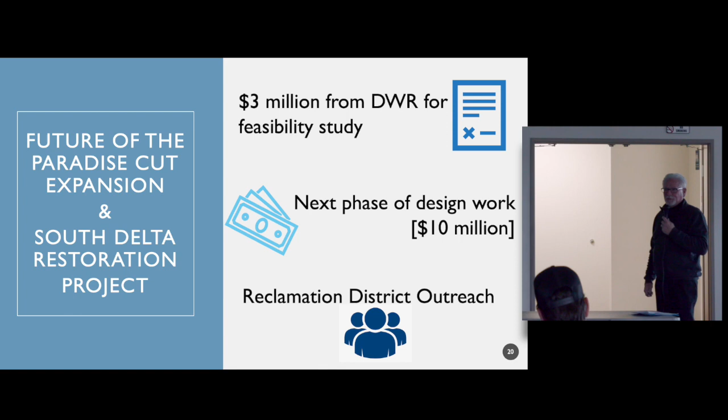I think that was it. I was going to say something else. That's about it. I'd like to turn it back over to Petrea to close things up here.

I don't know what you're talking about.